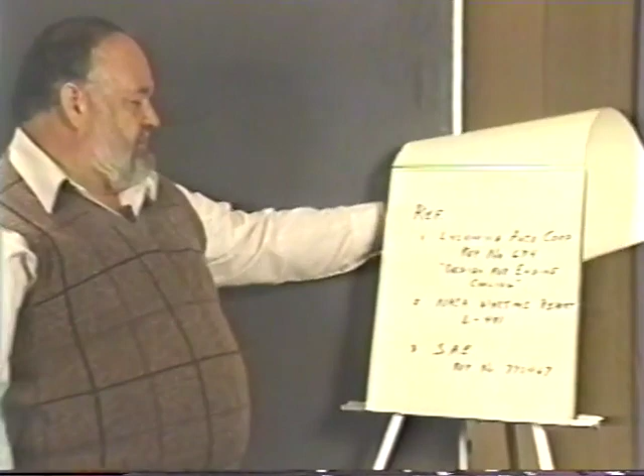Let's review this a little bit. If we're talking about engine cooling, we really have four basic subject areas to think about. There aren't a great deal of reference materials available on it, but these are three that I think could help the general aviation designer the most.

There is a reasonably nice report put out by Lycoming Avco Corporation, report number 674. This deals primarily with the internal design: once the air comes in through the inlet, how it has to go through the engine itself, how you can determine the amount of air that should go through, the pressure drop that is required, and the amount of horsepower and drag produced by this particular installation. For different altitudes, this covers a supercharged engine, so you can study designing cooling drag for high altitude conditions.

There is also a NACA report, unfortunately a wartime report, so they're a little hard to come by, but if you can obtain it, it's L491. And then there's an SAE paper done by Mississippi State University, report number 770467.

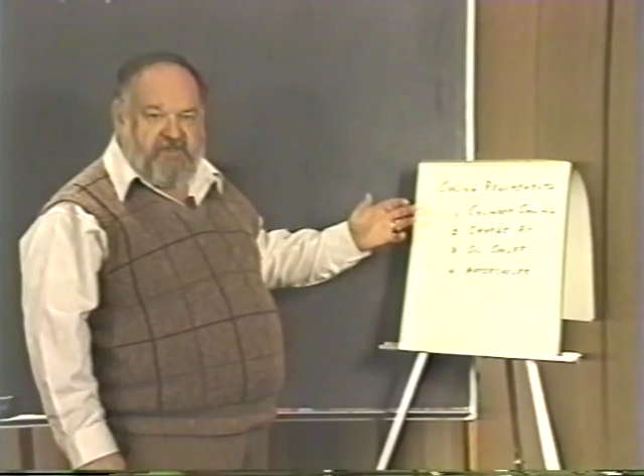Whenever you're talking about cooling requirements for an airplane, you have four major areas to be concerned with. One is cylinder cooling itself. The second is charge air, the amount of air you need to go into the carburetor. That's relatively straightforward, nothing too complicated. The obvious thing you want to do is get as much ram recovery as you can going directly to the carburetor and induction system, so you get maximum manifold pressure and maximum horsepower.

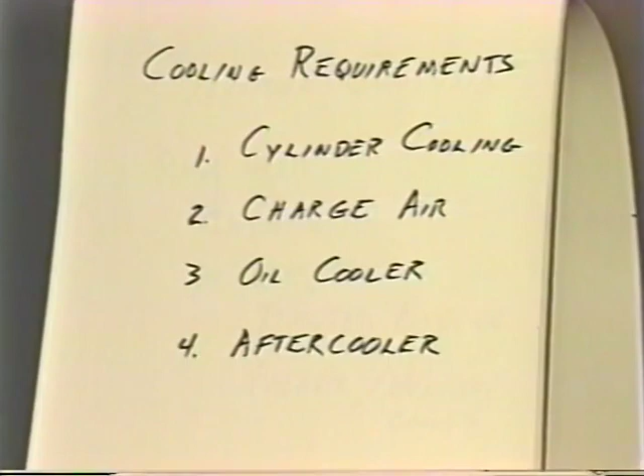Then there's sometimes a requirement for oil cooler cooling, you've got to provide an adequate amount of air to go through the oil cooler itself. That should be relatively straightforward, depending on the engine and the requirements for air flow through the oil cooler. Then there's aftercooler cooling, if you have a supercharged engine, where you want to take that supercharged air and cool it before it goes into the induction manifold system. If it's not a supercharged engine, you don't have to worry about aftercooler at all.

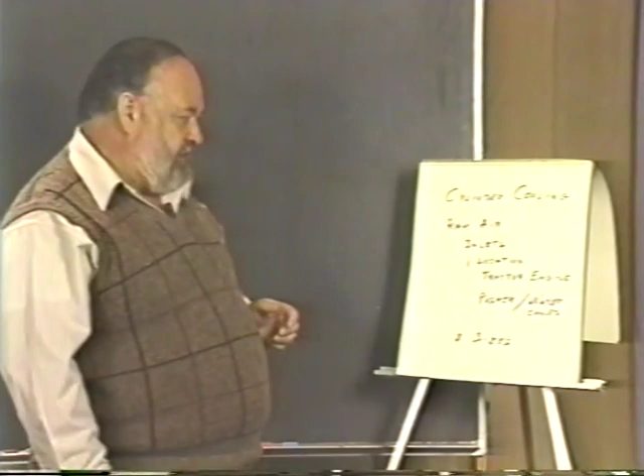So in this case, we're going to consider primarily cylinder cooling itself, what's required to cool the engine cylinders. This is the trickiest one of them all to deal with. The primary way is ram air: you have an inlet, you ram the air through it, it goes through the cylinders, and then you dump it overboard through the cowling, cowl flaps, or whatever happens to be there.

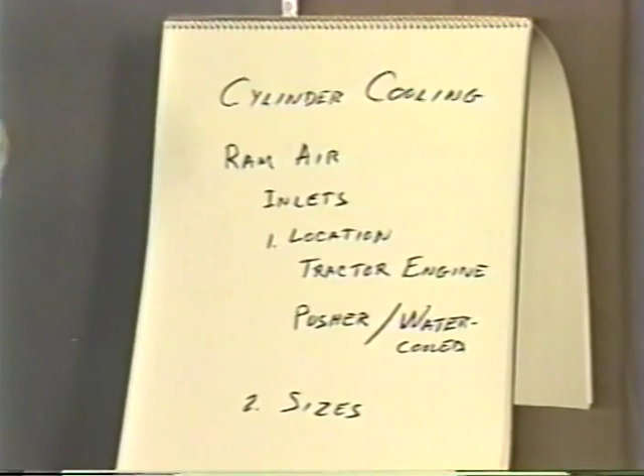There are two different areas that you have to really worry about. One is a tractor engine installation where the engine's up front, the propeller's mounted directly in front of the cowling, and we ram air in through the inlet openings. And the second is a pusher design, or really it could be even a water-cooled design.

With a water-cooled engine, even if it's in a tractor position where it's up front like a P51, since you have water-cooled or liquid cooling system, you now have a radiator. And a radiator you can put any place you want on the airplane. Same thing with the pusher installation. If you have a pusher installation, you have a great deal of flexibility as to where the inlets come in. It depends, of course, on the design installation.

In some cases, you really can't move the inlet opening in too many locations, but you do have some degree of flexibility to it. So the inlet itself is somewhat important as to where you put it relative to the rest of the airplane you go into it.

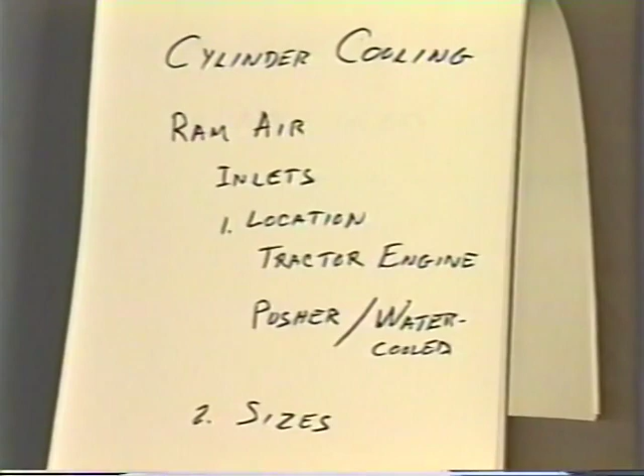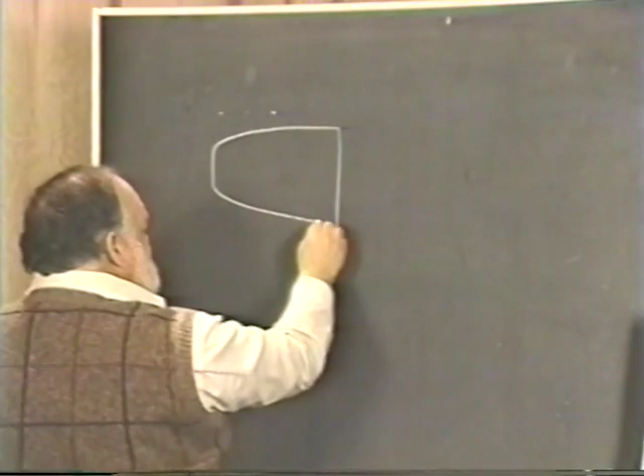Let's talk about that just a little bit further. Let's take a look at, say, a standard tractor installation. This would be considered the firewall, and this would be the cowling itself with the spinner right in here. And we have the cylinders mounted in this region. We really don't have a great deal of options as to where we can start putting the air inlets on the thing.

Obviously, we can get a little radical. We can put an air inlet down underneath, try and bring the air up through that region. We can try putting an inlet up on top and try to do something like that. But it becomes pretty obvious in both of those installations, you might get pretty good ram recovery because you're putting it right out in the free stream, but at the same time you're producing a great deal more additional drag because you have to fair that protrusion out, and also it's producing additional frontal area.

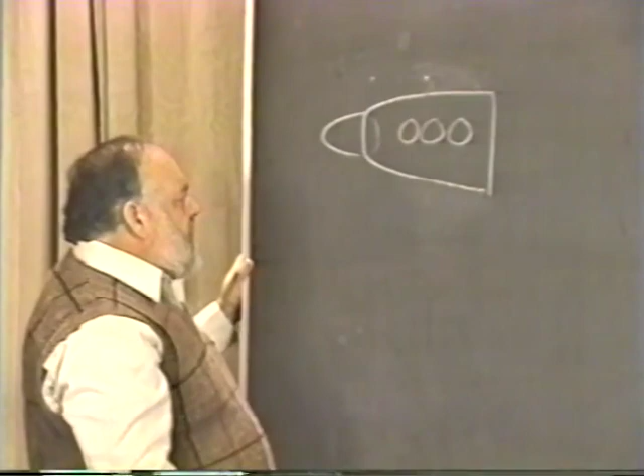So generally speaking, with an installation like this, you're pretty well stuck to dealing with some kind of zone right behind the spinner, right in the forward portion of the nacelle itself. A lot of times, because of the engine itself, without any prop extension on it, you end up with a relatively blunt portion of the cowling right in front of the cylinders, right behind the propeller spinner itself. And so this becomes somewhat of the most natural place to try and put an air inlet in there.

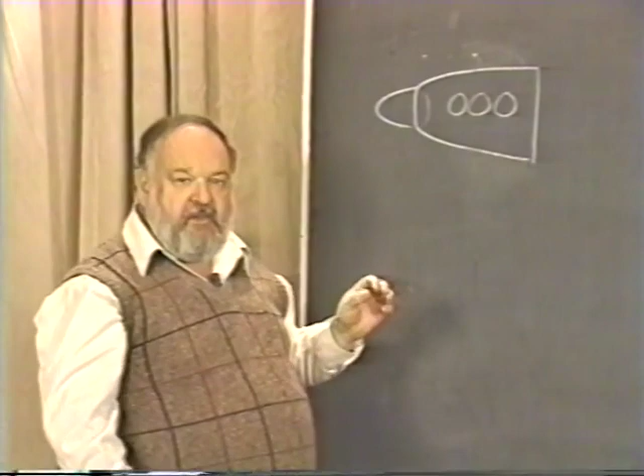The thing you have to be concerned about here is the fact that the air is flowing around this cowling, and because of the bluntness of the cowling, it has to slow down and stop and go around the cowling itself. So that becomes an automatic stagnation point. That becomes an automatic spot where you do want to put your inlet in there.

Somehow it seems to be common belief that you can control the amount of air that goes into the engine by how big you make the inlet opening. Well, that really isn't true. In practically every engine installation that you have around, the inlet itself is more than big enough. It will easily handle all of the volume of air that engine will need. What really controls it is how the air goes out. That's the area that can control how fast and how much air will actually go through the engine itself.

So the inlet, in its design, the key thing we have to be worrying about here is if we're stuck with a particular location, if we have to have it in one little spot in this particular region, you try to then have it in a zone that will be as close as you can to the natural stagnation point of the air flowing around the cowling, but yet at the same time in such a way that as the air flows around this inlet, it doesn't interfere anymore with the cowling or the rest of the airplane than possible.

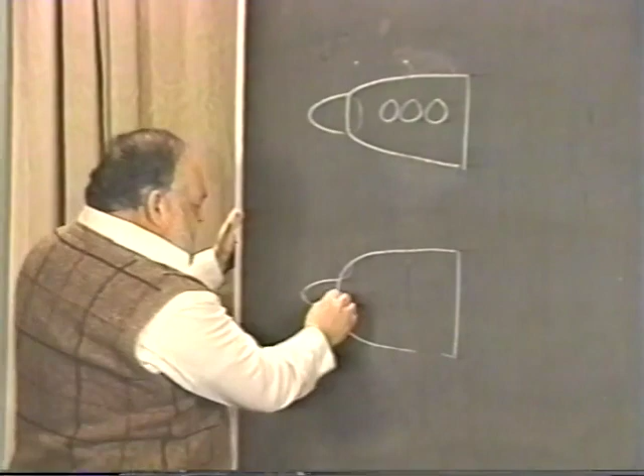Let's take the same installation and sort of look at a top view of the thing. If we're going to be dealing with these zones right in here, then we're going to have to try and see just which is the best way to try and get a particular inlet in there. If this happens to be sticking out and very blunt in here, then you've got a difficult situation to work with, but you're really stuck in putting your inlet right in that particular spot.

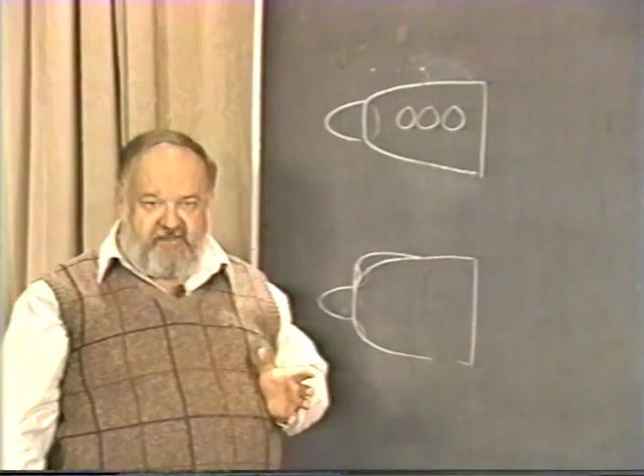Depending on the engine you have, you can look at the specifications and it will tell you the cubic feet of air that has to go through the cylinders and at what pressure drop. It takes simple calculations to determine, at climb speed configuration—probably the most critical, since you're not going very fast and likely at maximum continuous power, needing all the cooling air you can get—the amount of area necessary to get that particular volume.

It's good to look for a 20 or 30% increase in that volume, because if the calculations show you need half a square foot of opening, there's no way all that air will go right into that opening and through the cylinders. Obviously there's a lot of spillage that occurs around there.

It's interesting—if you take an aircraft, run it up on the ground at good high power settings, and get one of those signal smoke bombs, hold the smoke in front of the propeller and see how it's almost impossible to make that smoke go into the inlet. When it's sitting on the ground with the cowl flaps open, you're not getting great cooling, but you're getting some.

You can look at the cylinder temperature and see it's not rising rapidly right through the red line—cooling is going in. So there is air going into the inlet, air going through the fins, and air going overboard, even though you're standing still.

You can hold the smoke bomb up there and smoke will go every place you can imagine, but you can hardly ever see any smoke going into that inlet. It's amazing how little air actually goes in and how much bypasses and goes around. That's a real critical thing.

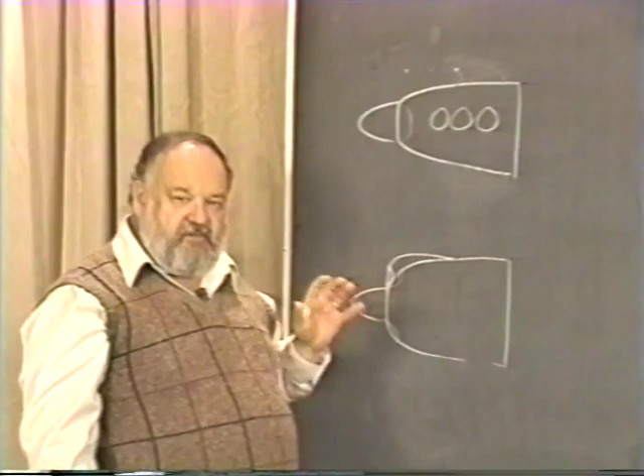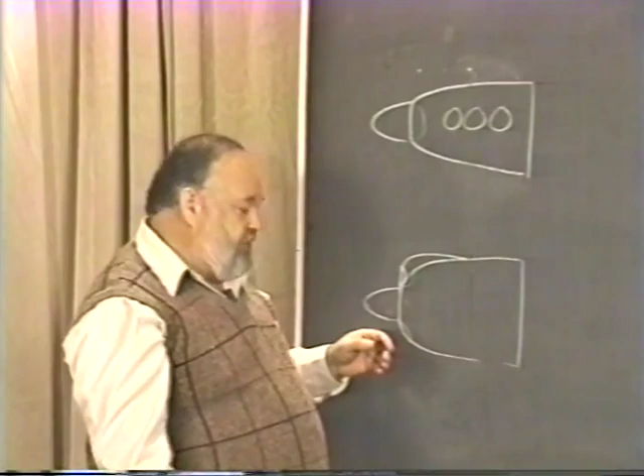You have to assume your inlet will be larger than you need—make it 20, 30, maybe even 50% bigger than your raw calculation for the cubic feet of air that has to go through there, realizing a lot of air will spill around it. Some will go into the inlet and some will come around.

So the lip itself, the actual lip of the opening, must be nice and smooth and round, anticipating that air will try to go into this region, not be able to make it, and turn around and come back out instead.

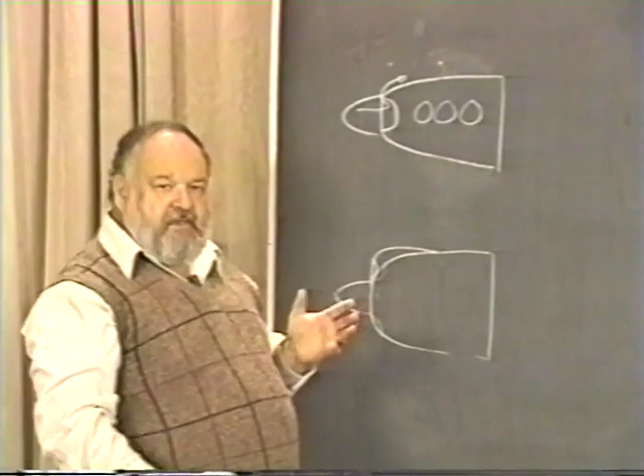There was a case back in World War II up in Canada with the Cessna T-50, a twin-engine trainer airplane. During the wintertime training, it was extremely cold, and even flying all day doing touch and goes, cylinder head temperature remained really low the whole time, with no cowl flaps on the thing. Maintenance and operations people were concerned these airplanes were flying with such low cylinder head temperatures, so they wanted to increase it.

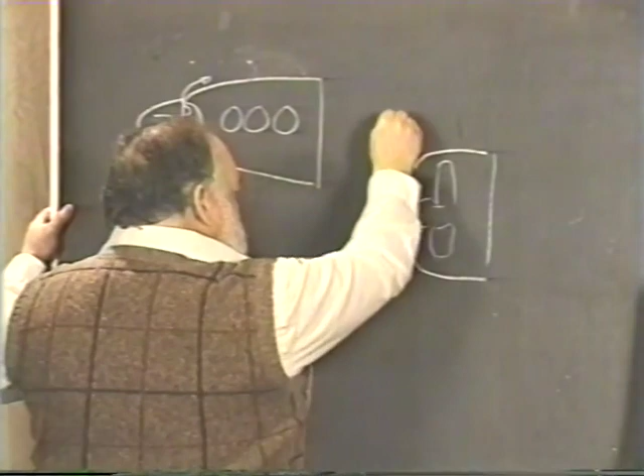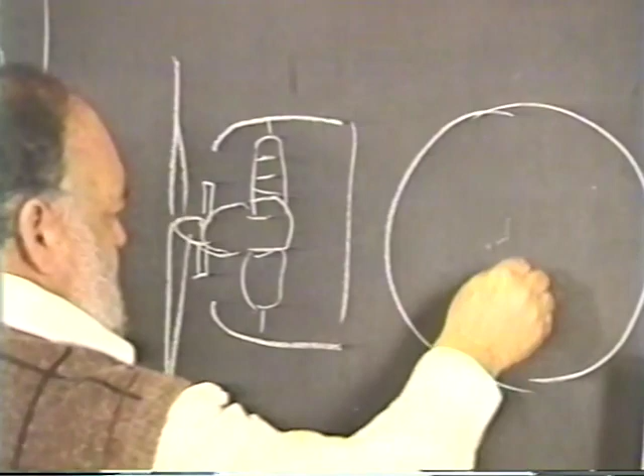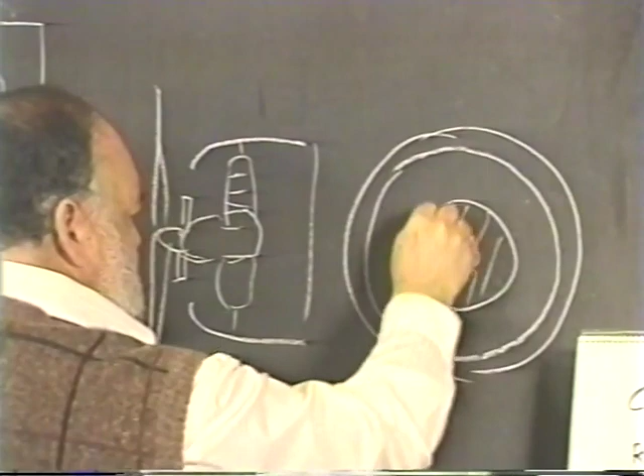This was a radial installation—picture the cylinders and engine, a cowling coming across, a hub, and the prop installation, no spinner on that one. With the baffles and cylinders in place, somebody reasoned that if they took a plywood board, cut it in a circular fashion, and bolted it onto the engine so that from the front view you had the hub and the cowling going around, putting this board in would block some of the air going into there. That made sense, except for one thing.

When they actually did this, the engine cooled even better. They were dumbfounded, so they made the board even bigger, larger diameter, and the cooling still went up. They decided to keep running the test to find out what was going on, making it bigger and bigger, until the big circular board was within about 1.5 inches of the edge of the cowling.

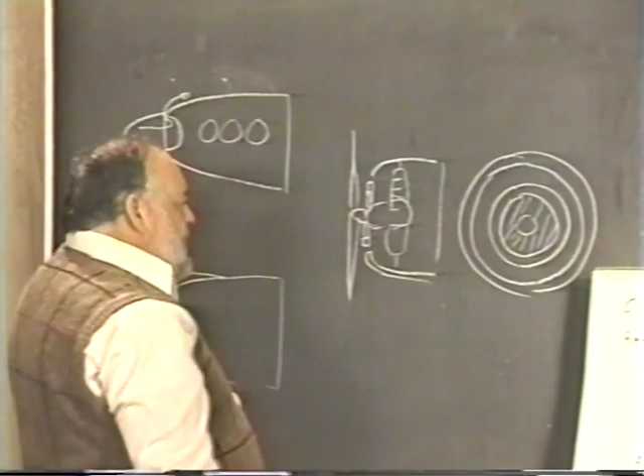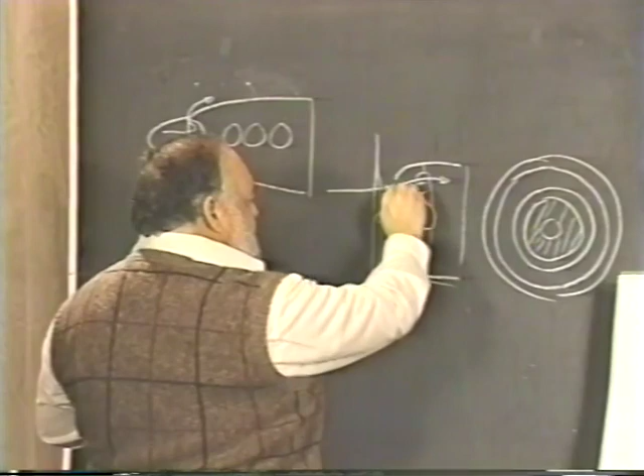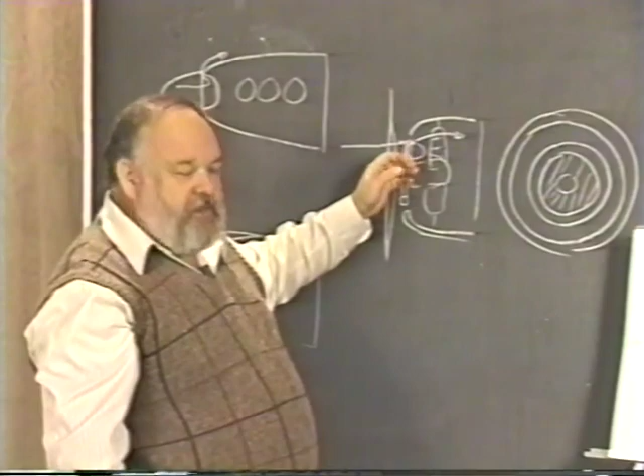What they were able to determine was that without this board in here, a lot of air was coming in. Some was going through the fins themselves, but a great deal was turning right around and coming out through the root section of the propeller itself. So a tremendous amount of air was circulating in here and actually coming out through the propeller and spilling out and around. By putting that first smaller size board in there, they literally blocked this air from coming out, increased the pressure, and made more air go through the cylinders, which increased the cooling.

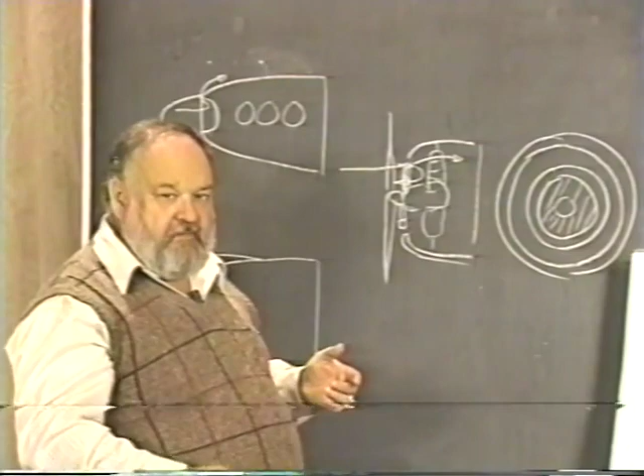So when you take a look at a radial engine, you see this big opening, and you can be doggone sure that a tremendous amount of the air in that total area is not going through those cylinders. In fact, it's turning around and coming back out. You can have the same problem with this thing. If your inlet is very large and particularly close to the propeller spinner, there probably will be some air that's actually circulating and coming back out right at the root of the propeller hub, with only a portion going through the fins.

There was a study done by Mississippi State on an Aztec. The Aztec had a standard cowling installation that looked pretty good, with a reasonably nice low drag shape and a somewhat rectangular inlet opening. But they found that this was not optimum, that there were losses there, spillage of air going around, and it was producing drag.

They eventually came up with a design that didn't look too attractive, but from a front view these were just round openings, almost like a 727 inlet opening, faired in very nicely into the cowling. They had this opening reasonably far away from the propeller center line, so there was real high speed, dynamic air coming off the propeller itself. They were able to get the inlet opening to be the smallest, and the inlet drag down to about the lowest levels it could be.

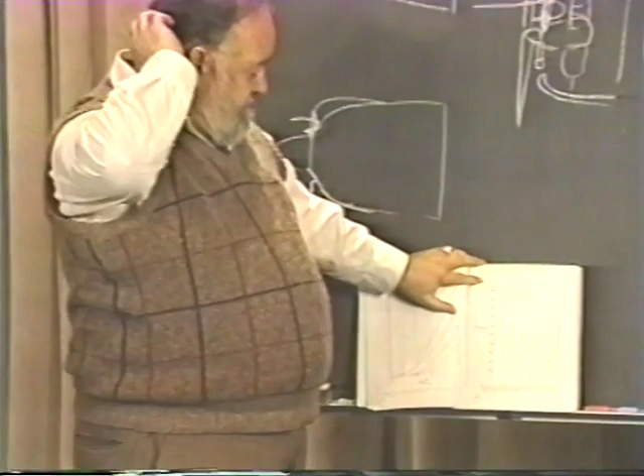Sometimes this becomes rather critical too. These factors end up producing drag characteristics much worse than what we would anticipate. Here is a NASA report, TN D-6800, all on a twin Comanche, with a great deal of study done on it. Here's a plot of the cooling drag coefficient versus angle of attack.

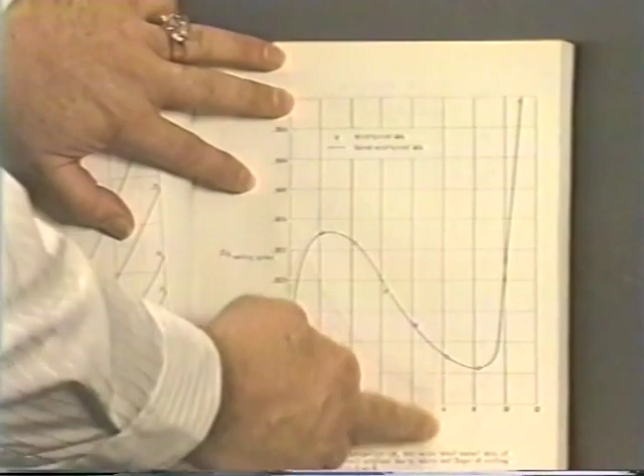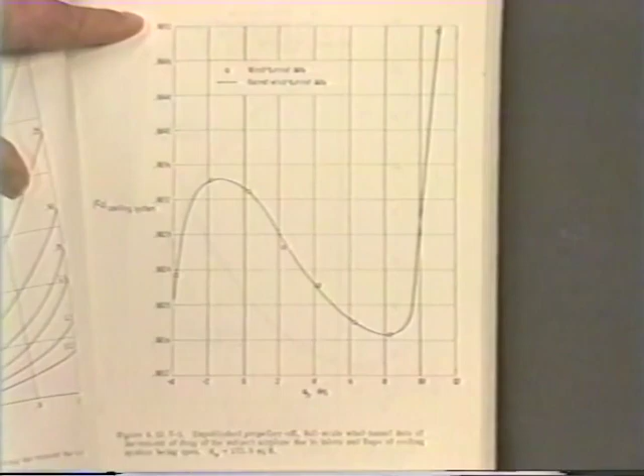At 8 degrees angle of attack, the CD is really at its lowest level. At 0 degrees, it was appreciably higher, 2 or 3 times higher. Somehow it went down when you went into negative angles of attack. But strangely enough, as you went from 8 degrees to 10 degrees, it really shot up, multiplying itself 4 or 5 times. This is something a designer really would not like to have - this tremendous variation in drag coefficient due to cooling because of angle of attack.

In this particular case, it has to be carefully looked at as to whether this was due to the inlet, or due to the exit area where the air was being discharged, or maybe a combination of both. It could not have much to do with the baffling inside the engine, because that is not a function of angle of attack.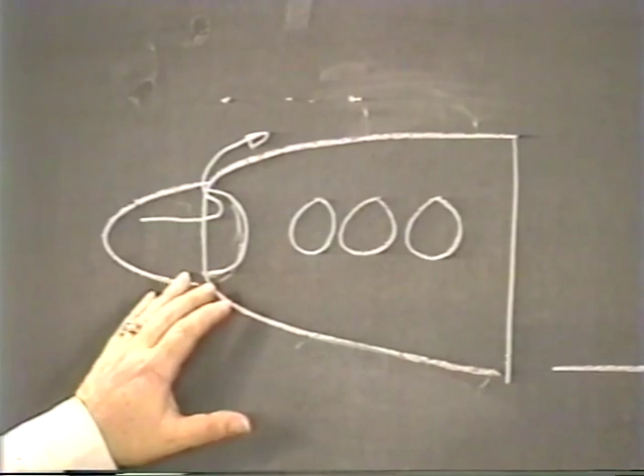While we're talking about the inlet opening, I'll give you another area that presented a problem for one company with a twin-engine airplane. They had a design with cowl flaps on the bottom that could open and close. In flight test, they noticed that in cruising condition they had adequate cooling with the cowl flaps closed, everything was fine. But when they opened the cowl flaps at cruise speed, they actually increased their cruising speed at exactly the same power setting, meaning they somehow reduced the drag of the airplane by opening up the cowl flaps.

Well, that was violating all the standard rules, because opening the cowl flap meant you had to bring more air through the cylinders themselves, and as you bring more air, you're creating drag, so that's got to be an increase in drag.

Well, that was true. In fact, they found out the cylinder head temperatures went down, but the airplane still increased in speed about 6 miles an hour. Now, this was an appreciable amount.

And they tried to analyze how this could be done, so that when we have the cowl flap open, with an increase of drag from the cowl flap sticking out into the airstream and an increase of air going through the cylinders, we actually still have a total drag reduction.

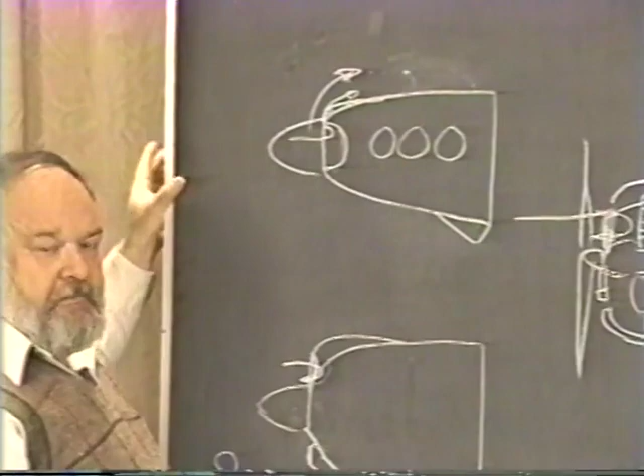What they found by analyzing is that this inlet was sticking up so high and was so sharp that by closing the cowl flap and restricting the amount of air going through the inlet, a tremendous amount of spillage air came up over the top. This spillage air caused significant separation on the cowling and caused an increase in drag.

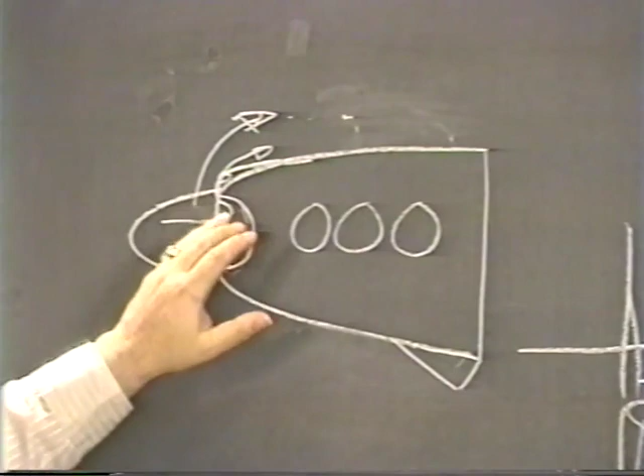By opening the cowl flaps and allowing more air to go through the cylinders, the spillage air reduced itself, the air reattached to the cowling, and the drag reduction in this area was so great that it totally counteracted the increased drag going through the cylinders. The net result: a 6 mile an hour increase in speed.

So proper design of the inlets is really quite important. It's not necessarily the most important thing you have to worry about in cooling design, but it is important. It's something to really think about and work on. Initially in your design, if you don't have access to a wind tunnel and so on, all you can do is use good judgment and good aerodynamic practices and thoughts on the thing.

But once you get into flight tests, you can start putting tufts around the cowling and visualizing what the airflow condition is. You need a chase plane sometimes to photograph that. With the new video cameras you have right now, you can get some real good movie results, and see what your tufts are doing. Be prepared to modify the inlets of the cowling itself to get better flow conditions.

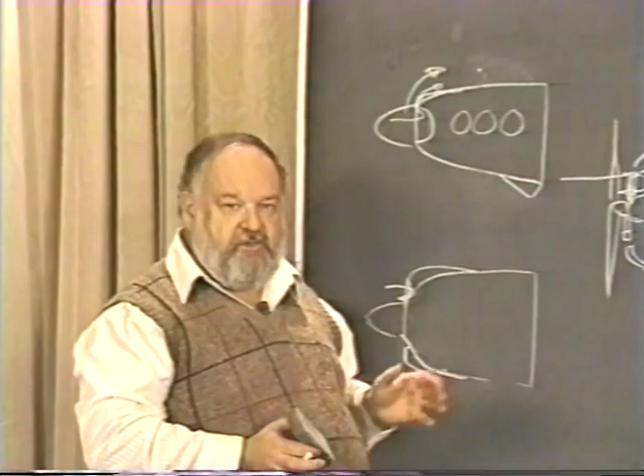But if you do, you can really start attacking that 19.7% drag of the total airplane. If you can reduce that 10 or 15%, or maybe even cut it in half, which is entirely possible, that's 37 horsepower — it's an awful lot.

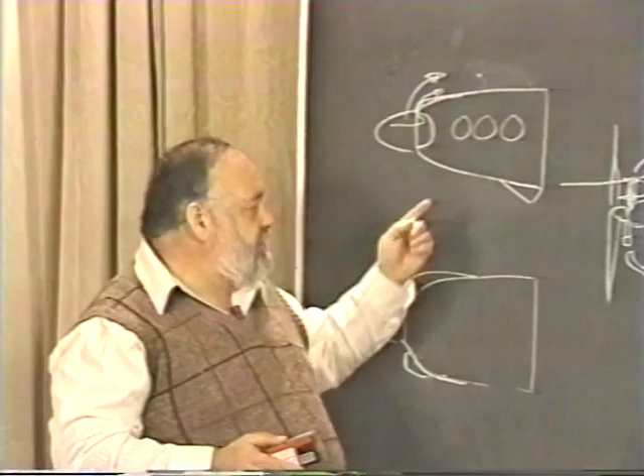When you start doing something like that to the airplane, that's just as important as trying to reduce the size of the tail, or the interference drag, or covers around your wheel wells — areas where you're attacking drag. This is an area where a lot of work and effort should always be put. Let's take a look a little bit more at the pusher designs and/or water-cooled engine installations.

Now let's take this pusher airplane. This is your propeller installation, and let's, for the sake of discussion, assume you have a wing down here, and let's assume this general region is where your engine itself is going to be.

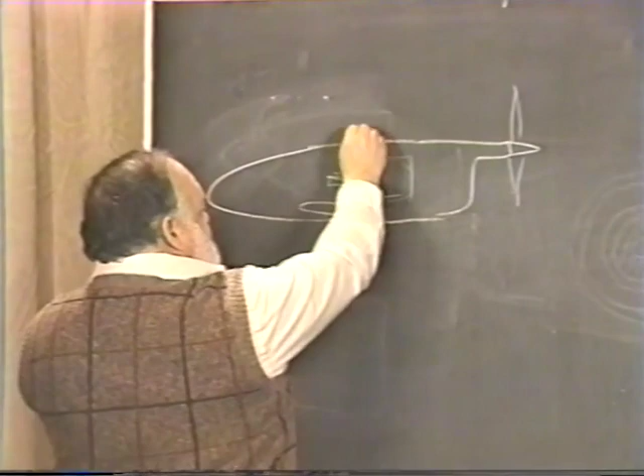You can bring air in from a zone right here. You can bring air from up on top. You can bring air from underneath on the bottom. There are several regions where you can start to bring inlet air into there.

What you want to do is two things. One, you want to bring in the inlet so that you can get a reasonable amount of ram recovery of the airflow around the aircraft itself. But you also want to do it in a spot where you have a relatively low drag input on the rest of the aircraft.

This region right on top of your wing, or near your fillets in this zone, is a very, very sensitive area. This air flowing over here has a lot of reasons why it wants to separate from the surface, become turbulent, and produce drag.

Doing anything at all in this zone, right where the wing intersects with the fuselage — whether this is a low wing, mid wing, or high wing — the condition is the same. It's sensitive. It's not necessarily the best place to try to put an inlet opening, because you may not only have poor dynamic recovery, but a good chance of flow separation, and if that flow separation continues back, it will cause a very large increase in drag on the airplane.

This region up on top, putting something up here, is not really all that bad, but under high angles of attack, under climb conditions, you're not really getting the best dynamic pressure up on top, and therefore it could be somewhat sensitive.

You could have a flow configuration coming over the fuselage, or depending upon how your windshield looked, in such a manner that you might actually start to reduce the dynamic pressure, the ramming air into this inlet, and therefore under climb conditions, which is probably your most critical condition of all, you really won't have good recovery. So that zone has a lot to be thought about and desired as to what the problem is.

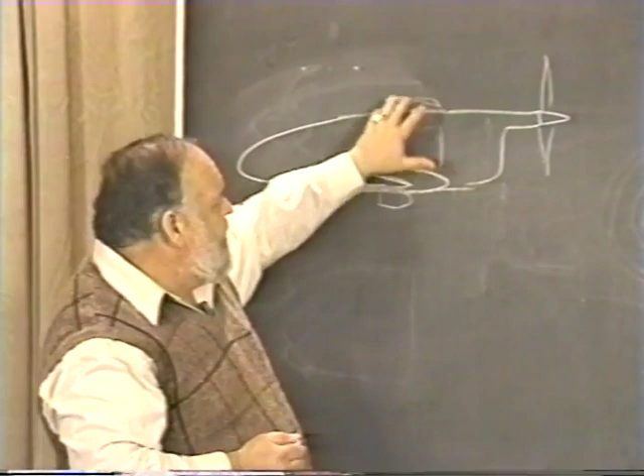Second thing is high angle of attack. Any protrusion you have sticking up above the fuselage also has the capability of having flow separation off of it, and therefore it might be more difficult.

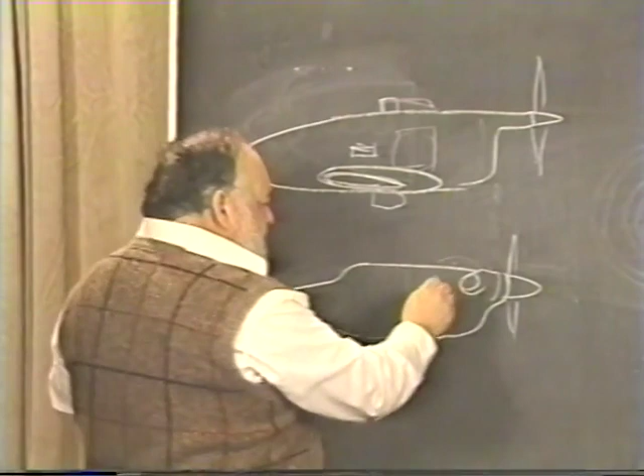On the other hand, you may have a design installation such that—let's just look at something like this—where your engine is right back in here, real high. You have a blunt arrangement, and you have your spinner and your prop right in here. And for other reasons down in here, this really becomes the only zone to do it in. Okay, fine, this is something you have to do. And if you're going to do it, it's probably good to have your opening far enough forward so that you can get a nice, good, smooth fairing in here.

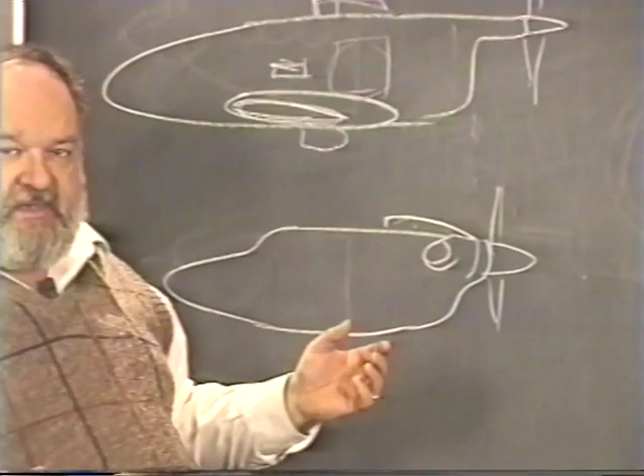Once you've got that inlet, remember, not all the air is going to go through that opening. A lot of the air is going to go around it, it's going to spill over it. You want to keep that air attached to the surface and flowing in, particularly since you have a propeller back in here. If you have flow separation going into that prop, you're going to not only have the drag of that flow separation, but your propeller itself is not going to operate too well inside that turbulent air. It's going to make a lot of noise for one thing, but from a performance standpoint too, it will have a definite loss of efficiency of your propeller itself. So it's a double factor here to keep that flow attached, have it nicely flowing into the fuselage.

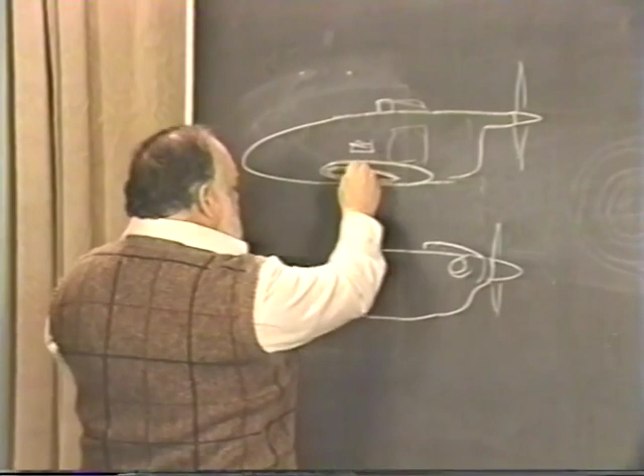On the other hand, if we go back to this, and if you have the option, this zone underneath here, from this portion of the wing, about one-third back from the wing aft—that whole region underneath there is an extremely good region to try to have recovery air for cooling. The P-51 installation, of course, is the perfect example of that. They had their cowling underneath in here like this, and in fact that was one of the very major factors of why the P-51 had some of the performance gains that it did have.

This region in here is right below the wing, at high angle of attack, low speeds. The wing is doing a significant amount of lift, it's a pretty good CL. There is a great deal of static pressure increase in here. It's also a region where the flow coming into that inlet is unobstructed—you're going to get maximum ram recovery. It's in an area that's not sensitive to flow separation and so on.

And even in the case of the P-51, they have a way back, and then they have the cowl flap doorway in the back region in here, that turned out to be an extremely good installation. In fact, it got perfected so well that by the final designs of the P-51, the inlet air coming in, the amount that spilled around, and the amount of air that went through there and went through the radiator had to be slowed down. There was a momentum loss there, therefore there's a drag loss there.

But as it went through the radiator, it actually got warm and became a tiny little jet engine. And as you could close the cowl flaps and let that warm air, relatively warm air, go roaring out the back, it actually increased in velocity. So there was a slight jet thrust action out of that installation. And the net result is that NASA claims that with a properly designed system like this, at high speeds, they had essentially zero drag due to that installation in there. That would be, of course, the optimum to go with.

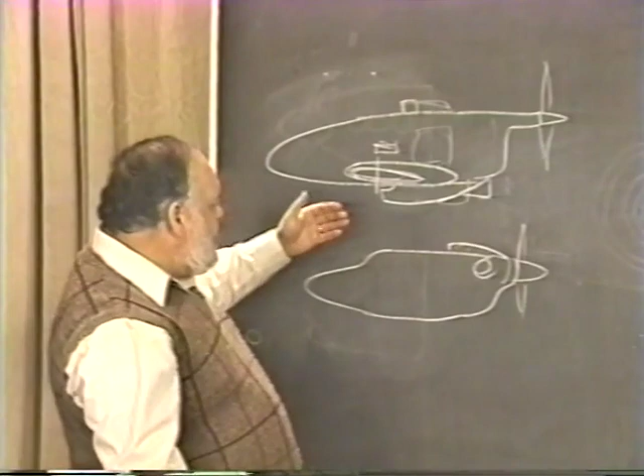So on a pusher design or a water-cooled design, you've got a variety of places to look for as to where you want to put your inlet. And the ideal region is below the wing and just slightly aft of the bottom of the wing. If it's a high wing installation, then the influence of the wing's pressure region is not as critical anymore. Still, down underneath might be good, or conceivably along the side of the fuselage there.

We've been talking about the inlets, the ram air inlets, and the basic location of the inlets based on the tractor or the pusher configuration.

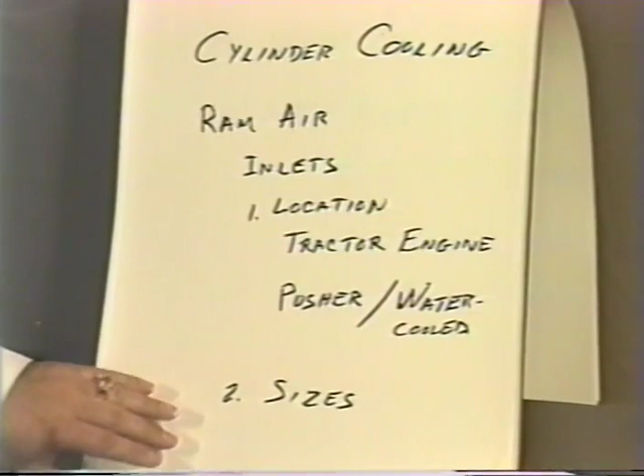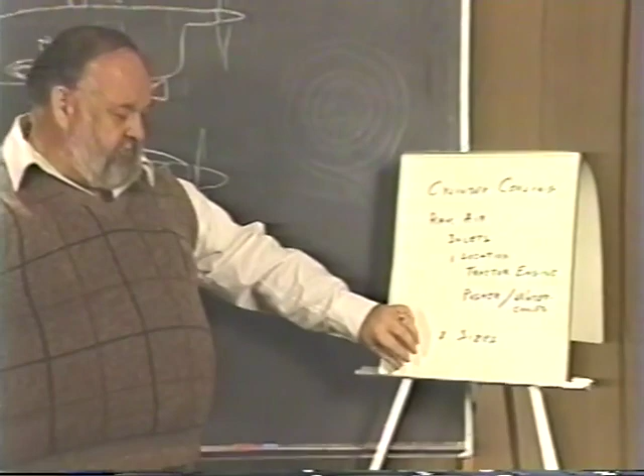We've talked a little bit about the size. If you don't want to go through a lot of calculations, you can take a look at other aircraft engine installations using your type of engine and get a basic idea of the size of it. But the point I really want to get across is that in practically every case, your openings will be more than big enough.

The shape of the opening itself, of course, there's some aesthetics involved, some good aerodynamics involved as to the actual frontal area shape, but the critical thing here is the lips around the opening. Make sure those lips are nice and smooth and round so that any air that goes into the inlet and doesn't want to go through the cylinders can come back out, flow around, and still stay attached to the cowling. If the inlets are very close to the top of the cowling and the top of the cowling is very flat across there, you can visualize it's going to be quite difficult for the air.

It's going to be quite difficult for the air to go into the openings, turn around, come back out the inlets, and then back out over the cowling without separating. If it's down lower into the center of the cowling itself, where there's a nice curved portion above, around the sides, and underneath, then you can visualize it'll do it.

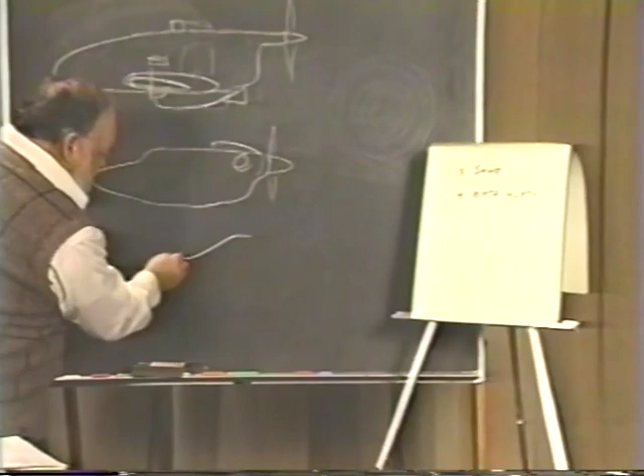We have the old NACA type inlet, the very flush, streamlined inlet. This is a nice inlet for several reasons. One, it has very little aerodynamic drag to it. Two, because of the vortex of the air flowing into the inlet itself - I'm sure you're familiar with the one I'm talking about - shaped like this, the air flows around and spins into this opening on a 7-degree ramp that it has, and very little ice or rain particles will go into the opening.

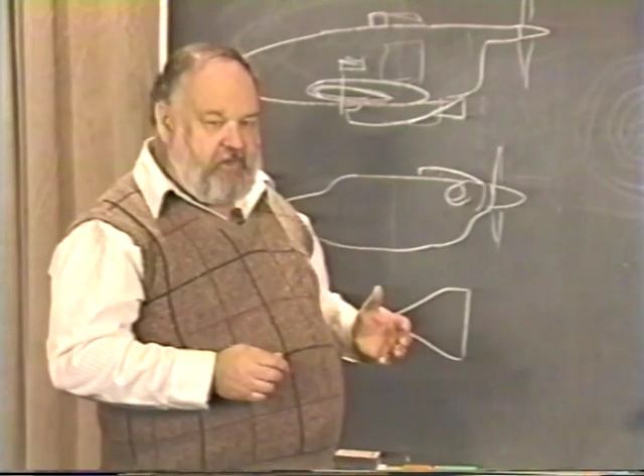That's good. What happens, however, is you cannot get complete ram recovery with this. On a perfect installation, you might get 97-98% ram recovery. In other variations of this design, you might have much lower than that. So you don't want to use a NACA type inlet unless you absolutely want to keep the drag level down to the lowest as far as external drag surface goes, and you're willing to suffer some losses of ram recovery. That type of inlet has to be used at the proper time and place. There are some things, like cabin heat installations, where you don't need 100% ram recovery. That's fine.

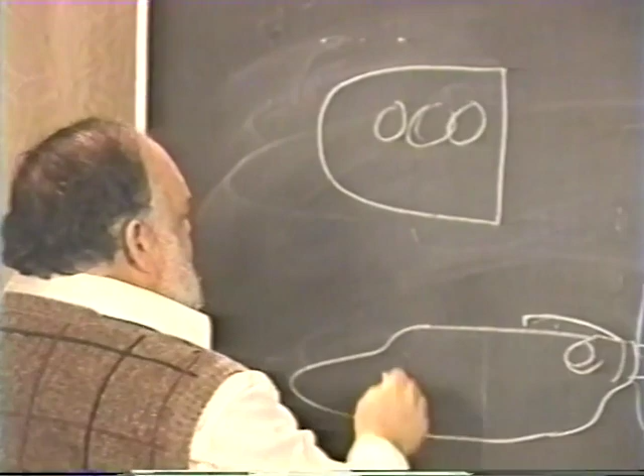Let's go on to the next area here, the baffles themselves inside. Fundamentally, we have two types of baffling systems. Let me redraw this - you have a downdraft or an updraft. Let's talk about the standard cowling configuration, and we have the cylinders in here. You can either have the air come down through the cylinders, or you can have the air going up through the cylinders. Frankly, either method is about the same.

It sometimes depends a little bit more on the engine installation itself. Today, with the 4-cylinder or 6-cylinder horizontally opposed engines, the most common system is a downdraft system, where the air comes in through this opening, flows down through the cylinders themselves. Normally, the exhaust pipes are down underneath too, so that the warm air coming through the cylinders is not preheated by the exhaust pipes, which is what you would have if the air was going the other way.

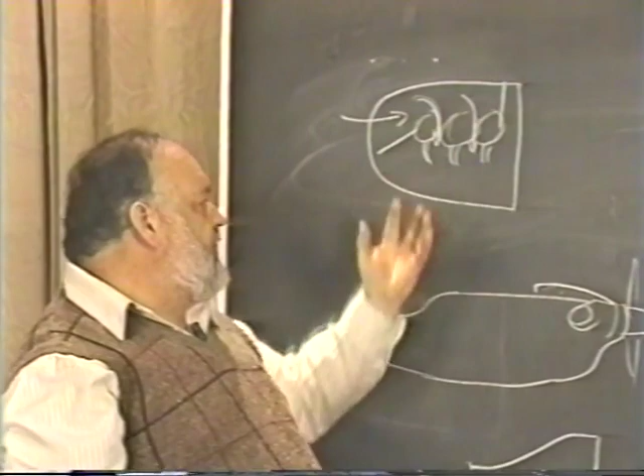If you have an updraft, some of the cooling air coming up through, before it gets into the fins, will have to go around the exhaust pipes themselves. They're very hot, they'll transfer some heat, and the air will get warmed up. You might have a little loss of efficiency there, but that's not necessarily a critical thing. There isn't a great deal of data showing a significant difference between updraft and downdraft. A lot will depend on your cowling arrangement. Normally it's downdraft, and that's the type of situation most aircraft end up with, and that's the one you can sort of take a look at.

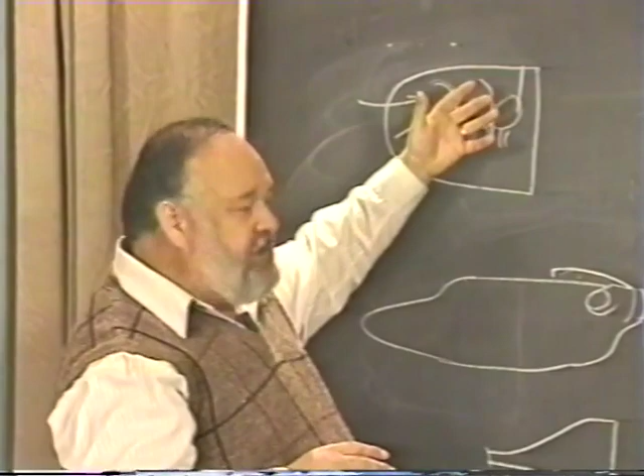There isn't too much you can do here, unless your baffling is very poor. If you don't have it close up around the cylinders, or if you have gaps or openings in other spots, you're going to have ram air, cooling air, coming in that never goes through the cylinders. It goes around it. Well, that's drag - internal drag - and it did not help cool the engine.

In fact, it probably hurt cooling the engine because there was a loss of pressure drop between the cooling air and the plenum chamber below it. Therefore you have a total increase of air flowing through the cowling, and that's an increase in drag. So try to get the thing reasonably well sealed so you don't have those losses.

What's done inside the engine cowling can best be analyzed by getting hold of that Lycoming report and studying it. But there isn't a whole lot you can do there. The engine itself is designed the way it is. It requires so much airflow through the fins, and all you can do is seal it up as best you possibly can.

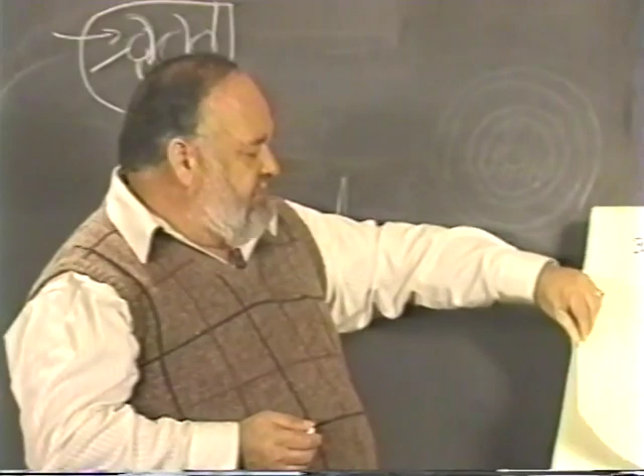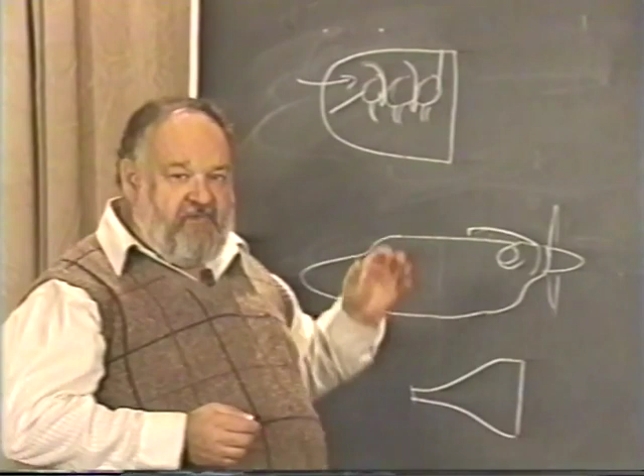The next region we have to consider is the exit itself. Where does all this warm air come out of the cowling? That's probably the most critical thing we have to worry about, because the exit controls several things. One, it literally controls the volume of air that's going to flow through the cylinders. If we have an adequate opening in the front, controlling how much the opening is in the exit portion and where its location is will have a great deal to do with how much volume comes through. You can throttle it down or increase it, particularly with cowl flaps.

The pressure differential will have a great deal to do with the exit area itself. When you're flying through the air, the maximum you can do is take this dynamic air flowing at you at 100 or 120 miles an hour and slow it down to zero. Once you stop it, that's all the pressure recovery you can get. Now when that goes into the plenum chamber, if that chamber is choked off so much, its pressure will be the same on both sides, and therefore you'll have no flow through it.

As you open this up, you'll gradually reduce the pressure on the warm side of the engine, and that causes the pressure differential. So the exit area and the cowl flaps have almost direct control of the pressure differential between the top of the cylinders and the bottom of the cylinders. Cowl flaps, of course, are the best way of doing it.

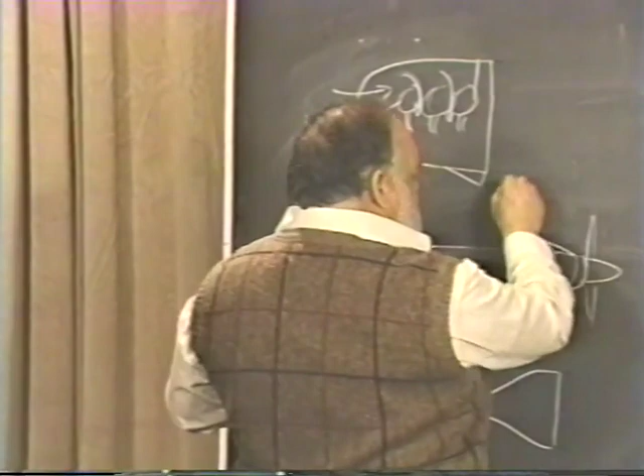These are little devices you can put on the bottom here. From an end view, this might be the bottom of the fuselage. Maybe you already have an opening right here to let the air come through. That's a real good installation. When you lower the cowl flap, you get this much increase in exit area, and now the volume of air and the pressure differential can be at their maximum.

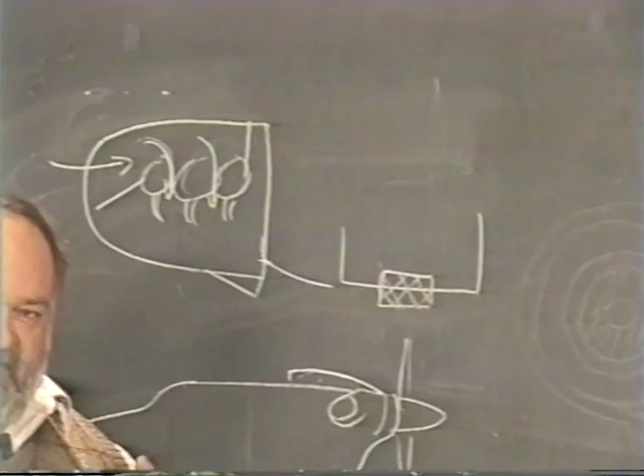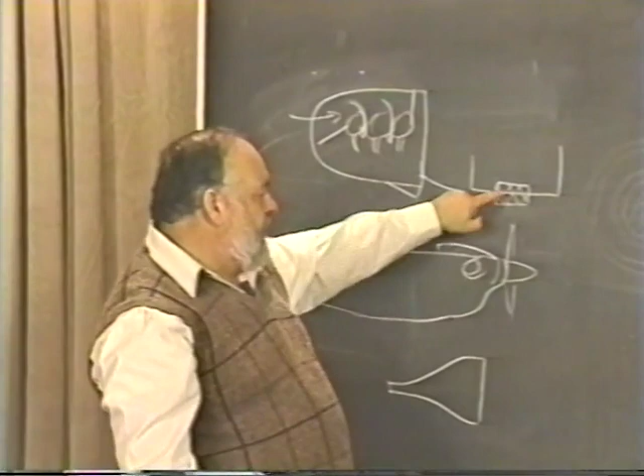This is a condition you might want while climbing. You don't have a great deal of forward speed, and you need all the cooling you can get. But once you're up at cruising speed, going quite fast with good dynamic pressure, you don't really need that much cooling air. Now you can close the cowl flaps, restrict the area, and have adequate cooling but no more than you really need, and therefore no more drag than necessary.

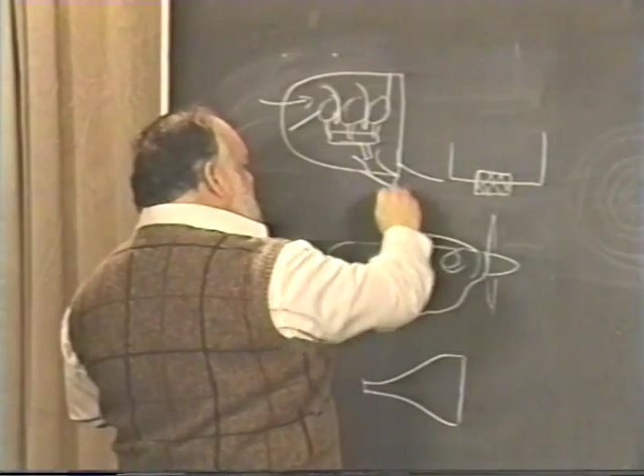Two areas we haven't discussed yet: one is using the exhaust itself as a thrust augmenter. The exhaust goes into some sort of manifold; the exhaust itself is high energy air being pumped out. You can put that into a form of venturi, making a little venturi here. This becomes a jet pump, as it's called, or a thrust augmenter, whatever way you want to look at it. It becomes a very interesting way of reducing the power required for cooling the engine.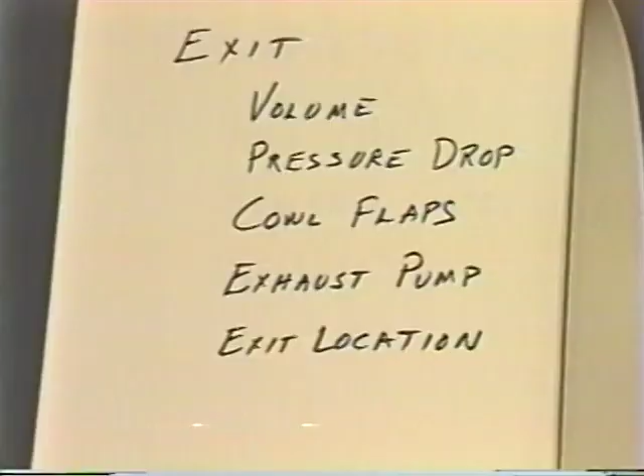The difficulties with the exhaust pump, or jet pump, are that you cannot control the exit air very well. You cannot put cowl flaps on the exit area of the pump, because restricting the cooling air also increases the back pressure of the exhaust pipe, which is detrimental. Also, you're dealing with somewhat contaminated air—not just plain cooling air through the fins, but air with all the exhaust fumes involved. And second, you generally have to have a fairly long augmenting tube there.

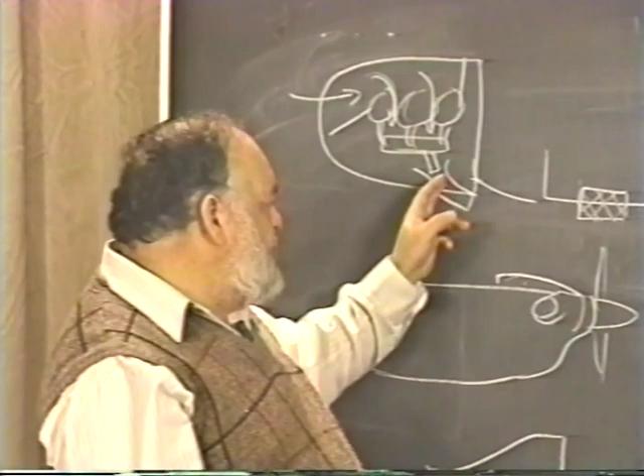With your Venturi, you have to have a relatively long pump to get the proper jet pumping action. And third, it is quite noisy. There's no way of actually reducing that noise. In fact, it almost becomes a megaphone and increases the noise.

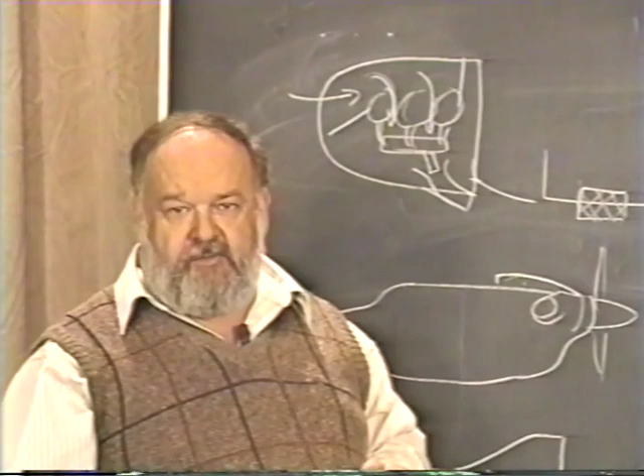We used to have the Convair 240 and 340 and so on, had jet pumps. They were some of the early ones to use this. And on general aviation airplanes, we had the Twin Bonanza and the Aero Commanders and so on. That system has been pretty well eliminated. It does produce a certain degree of efficiency in reducing the power required for cooling the airplane, but the disadvantages sometimes outweigh it, and it isn't really worth it.

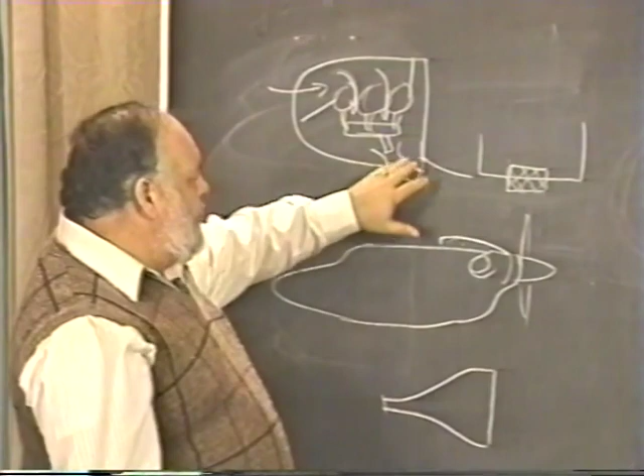The other thing we really have to consider in any of these installations is the exact location of where this cooling air goes out, where you have your cowl flaps. The general common one is down underneath the cowling and the bottom of the fuselage. There's some real advantage to that, because any oil leakage or fumes will flow out through the cooling air, out through the belly of the airplane, and just from an aesthetic standpoint, you don't look like you have a very oiled, greasy airplane installation.

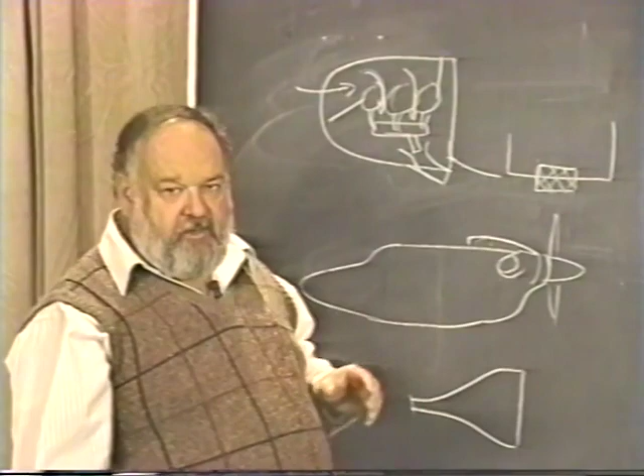The top of the cowling in this region, aerodynamically, has some really nice properties. Particularly at high angles of attack, this becomes a region of lower pressure, and it'd be very nice to let this hot air come out there. But of course, that almost restricts it to an updraft installation, or requires you to come back into this region. Aesthetically it might have some problems, and there may be some other difficulties.

Along the side of the cowling is another potential area, but there's really no big advantage there unless it's more from a manufacturing aid or anything else.

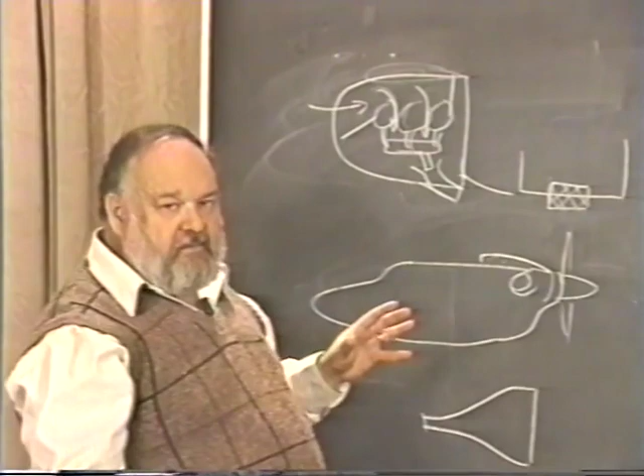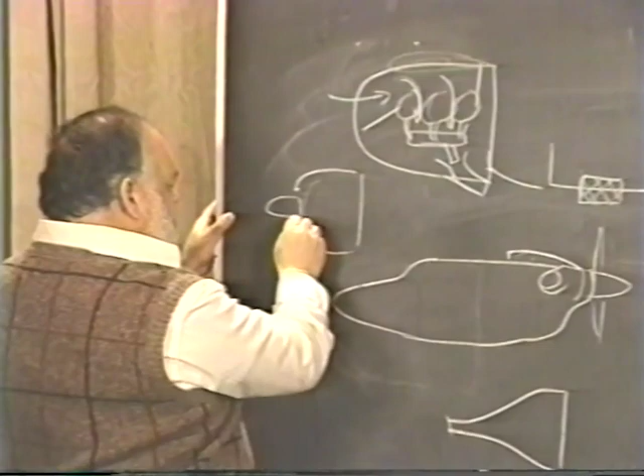When NACA did some studies way back on the old radial cowlings, with the spinner placed here, for example, here's the engine installation. If this is where the air went in, they found the very best place is to have the exit air right in this region. They would have to have a double cowling, and the air would go through the cylinders and through the fins, turn all the way around, come back in, and then out in this region. By having the air go in and come out very close to where it went in, adding it back to the slipstream right there, that turned out to be the lowest drag region.

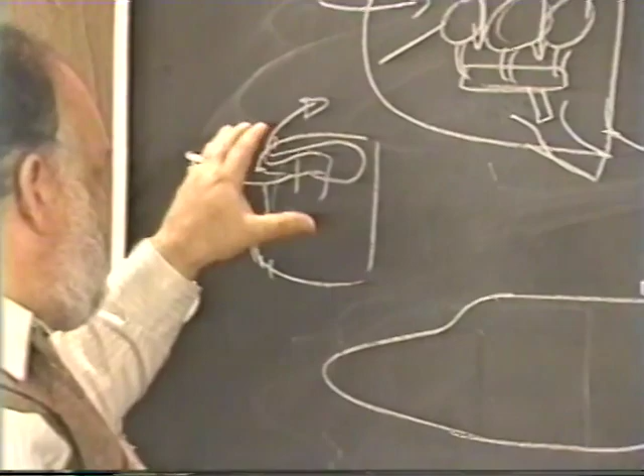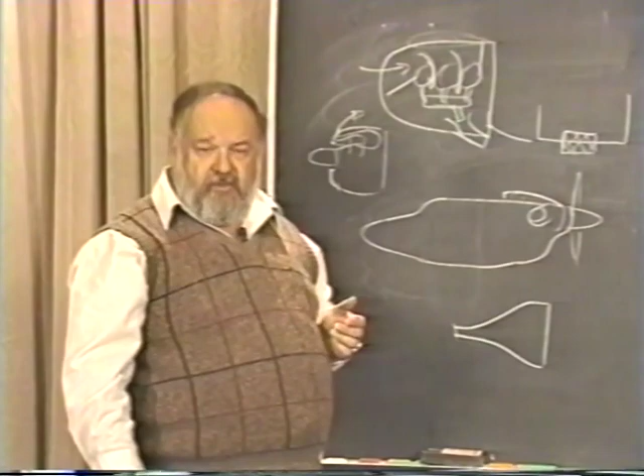But the reduction of drag from this exit area isn't really worth all the complications and difficulties it creates. I've only seen one airplane ever designed, built, and flown that way: the old Curtiss O-47 observation airplane. It had a big radial engine with some openings right around the periphery of the cowling inlet. But even though this is maybe theoretically the best, it has a lot of practical limitations that isn't really worth talking about.

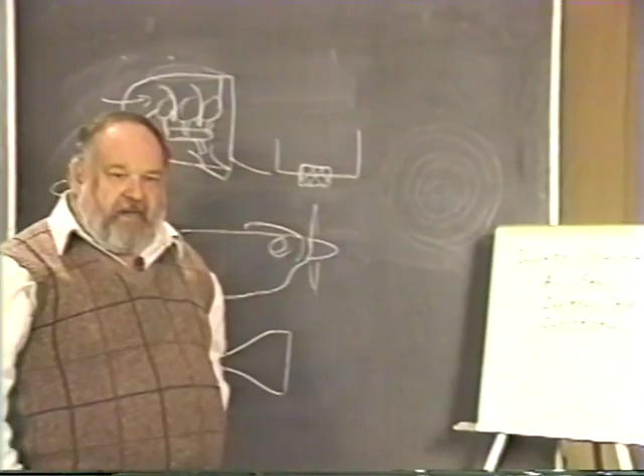We've been talking all this time about ram air cooling. There's another area we really have to consider, and that's blower cooling. What if we didn't worry about ramming the air through all these fins and cylinders, and instead actually took a blower? We could either use an axial fan blower, a squirrel cage blower — essentially a centrifugal type pump — or we could even use an electrical blower, driven by an electric motor.

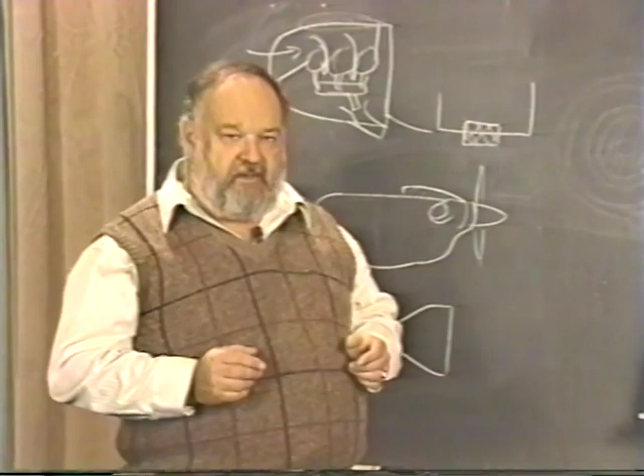There's a lot of merit to this. There was a lot of work done at the end of World War II — the Germans did it, we did it — where we'd actually have a cowling installation with fins, and propeller blades installed right to the hub. Instead of just ramming air, we had a controlled axial fan that pumped the air into it.

Now, when you think about the Bellanca, where 37 horsepower is being used just to cool that engine, you can imagine that you could make a mechanical pump — an axial fan or squirrel cage — even with its losses and inefficiencies, to produce all the cooling air you need without having to worry about aerodynamic drag. Most of the designs I've ever seen use some form of a blower — a squirrel cage blower, an axial fan, or something like that — to cool it.

In practically every installation I've ever seen, there is definitely a drag reduction, a horsepower requirement reduction. So going to a mechanical driven system for cooling, I think is an area that has a lot yet to be worked on, and I think it can actually turn out to be a real good system.

It's a little bit like saying you have a generator on your engine right now to produce electrical power. Old days we used to hang one out in the wind and ran it with a propeller. Well, we soon found out that ramming air through that propeller to give us electrical power was not nearly as efficient as having it attached directly to the engine itself. Now it takes power off the engine, there's no question about it, but it's a far more efficient way.

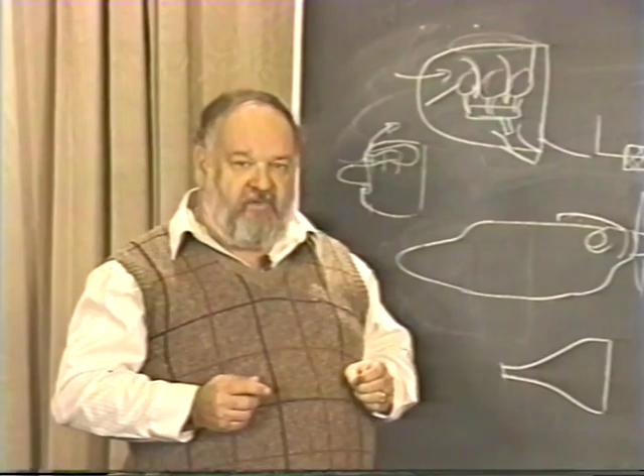And the beauty of it is by having an actual blower to do your cooling, you can now have it proportional to engine speed, and maybe therefore exactly the requirements. As you slow the engine down, you sure as heck cannot be going to maximum horsepower, therefore you don't need maximum cooling. So when you're at maximum horsepower, maximum RPM, that's when your blower is going to do the best job, not a function of forward speed.

Now, you still could use a blower and then use good aerodynamics as to where the air comes into the blower and where the air goes overboard. So therefore, once you're moving through the air at 200, 250 miles an hour, you don't necessarily have to use the ram recovery, but you can use it in conjunction with your axial fan to reduce the power requirement that the fan itself might do.

So I think this is a region that even with general aviation airplanes and small light airplanes, we ought to take a real good look at the possibility of using blowers on there.

An axial fan, when you get down real small in diameter, has to turn pretty fast, so you have to maybe speed it up faster than the engine goes. But a squirrel cage blower will produce all the pressure differential we need and all the volume we need, turning at about the same RPMs, 2,000, 2,500, maybe 3,000 RPMs at the most. And so I think some clever work can be done there.

Of course, helicopters for years now have been using engine installations, and they put fans on there. Again, if you study it real carefully, you're going to find out that the power required by the blower to run those fans is always less horsepower than you've ever determined, calculated by using a ram air method. The ram air method's simple, there's no extra parts, it doesn't break on you. Once the airplane's flying, you're getting cooling air. But on the other hand, if you're looking for best performance and maximum performance, maybe that's the way to go.